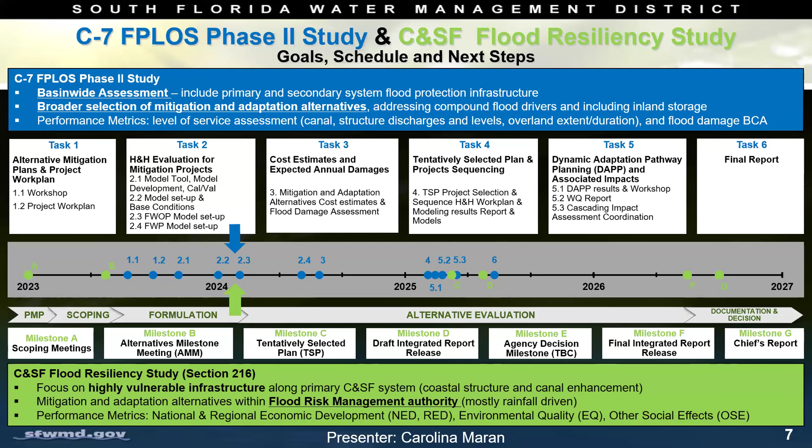And here you have a little bit of the tasks that will be developed. You can see that we end this FPLOS basically mid-2025, when we will have one of the major deliverables from the 216, which will be the TSP, the Tentatively Selected Plan. So I think it's important for you all to understand why we are here, how we are ensuring that those two studies are communicating with each other, and how the project teams are really collaborating as we find those alternatives for those basins and throughout the phases of both of those studies. I have one more slide.

Again, I'm going to repeat that because I think it's a little bit of what we want to get out of this workshop today. We really want to be able to focus on what we need at the C-7 Basin, in addition to what we know we might be getting out of the 216 C&SF flood resiliency study. So secondary canal enhancements, secondary canal interconnections, storage basin-wide, integrated nature-based green infrastructure solutions, and interbasin connectivity, and really what else we need to understand as a basin that we can do here to reduce flood risks.

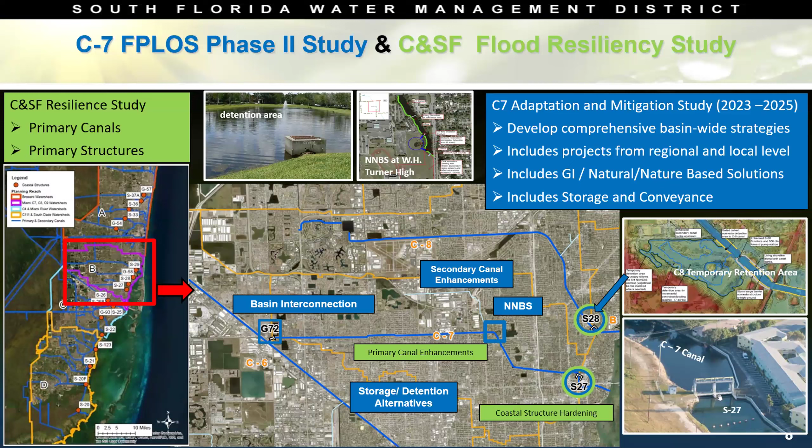Thank you. So can you hear me? Yes, coming in well. Okay, thank you.

Good morning, everyone. Thank you very much for attending this C-7 Adaptation and Mitigation workshop. I will give a quick overview of the flood protection level of service program and this C-7 study. Next slide, please.

Let me start by sharing some numbers. We have over 2,200 miles of canals, over 2,100 miles of levees and berms, and also 160 major drainage basins, over 1,469 water control structures, including 89 pump stations. And we have over 60,000 acres of constructed wetland system.

Lake Okeechobee has a water surface area of over 450,000 acres. And the water conservation area is about 960,000 acres. So we have a large flood control infrastructure system. Next slide, please.

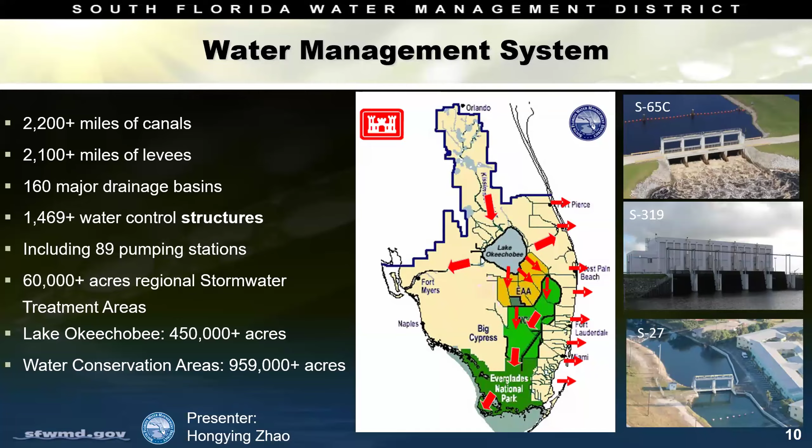Meanwhile, we encounter numerous challenges. Rapid urban development and population growth, significantly contrasting the condition in the 1940s. Many structures have already surpassed their intended lifespan. Climate change, as has been testified at Congress, is turning extreme events into new norms. And for Miami-Dade County, we have so many vulnerable coastal gravity structures. All of these factors underscore the significance of the level of service program: safeguarding tomorrow, today. Next.

So in a phased approach, the level of service program is really to assess flood protection level of service across all 16 counties in an 8 to 10-year cycle, evaluate and prioritize long-term district infrastructure needs, identify at-risk structures and needed improvements, and provide a formal process to initiate mitigation and adaptation efforts. Design, permit, and construct identified projects to achieve resilient flood protection goals. Next, please.

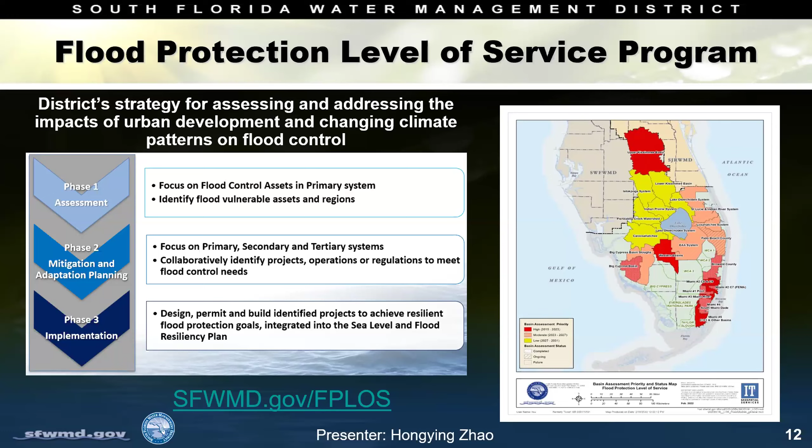As both Dr. Kadach and Dr. Maran mentioned, the purpose of today's workshop is to brainstorm adaptation and mitigation options to help build flood resilience for the C-7 or Little River watershed. This is your hometown, and you all have a lot of knowledge of the basin. And here is just a quick summary of this watershed.

We have 6 cities: Village of El Portal, City of Hialeah, Miami Shores Village, City of Miami, North Miami Beach, and the City of Opa-locka. There are 254,000 residents based on the 2022 census database, and also additional visitors and workers. Over 118 critical assets, including airport, fire stations, waste transport facilities, hospital, medical facilities, public school, law enforcement center, etc.

And 46% of the population are disadvantaged under the climate change category. In terms of CDC Social Vulnerability Index, 67% of the population has an index of 0.8 or higher, which is the highest ranking. And 27% of the population has an index between 0.6 and 0.8, which is the second highest ranking. Next.

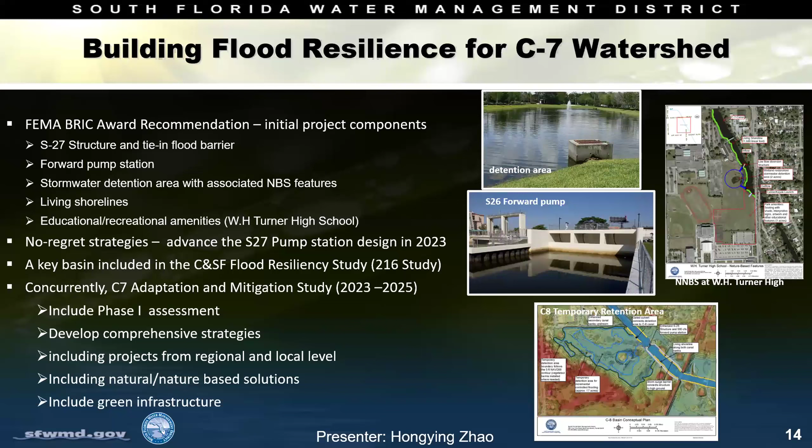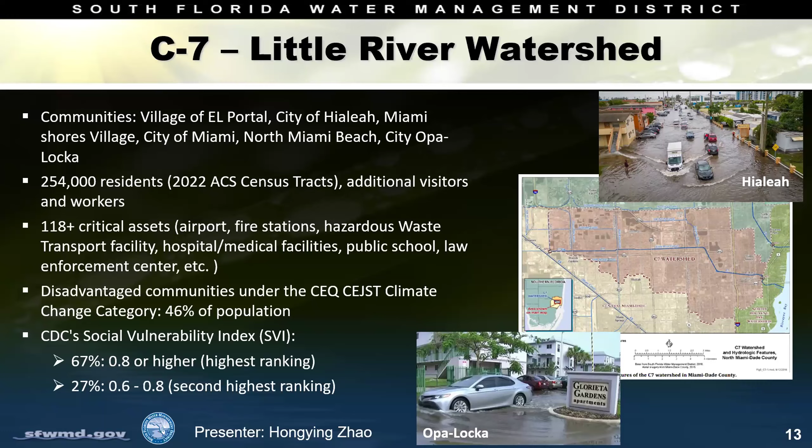Just want to echo what our Chief Resilience Officer, Dr. Maran, just said in the beginning. We understand the challenges ahead and recognize the key components to make it a success. Collaboration is paramount at both planning and implementation phases.

Adopting a basin-wide coordinated approach is essential to address both local and regional priority needs effectively, and embracing a hybrid approach, integrating both gray and green infrastructures alongside nature-based solutions, is imperative. And implementing no-regret actions in the short term, but ensuring they're robust, adaptable, and evolvable over time.

Toward the end of this workshop, we will share with you how you can actively participate and contribute to this project. So let's move forward together, addressing these challenges head-on and build a more resilient future for our Little River watershed. Thank you.

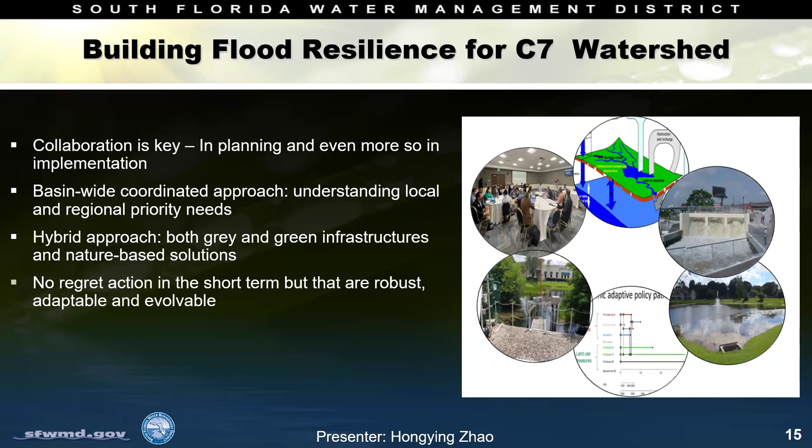Thank you, Dr. Zhao. Now, I'd like to just pause for a moment. We've heard a lot of information from Drs. Maran and Zhao, and I want to just pause for a moment and allow for any questions or clarifications. Remember, you can go ahead and raise your hand and we will unmute you. I see a question. Let me see who we've got. And I would like to ask participants as they come off of mute to say their name and organization. And I see that we've got Munir Ingram. You can come off of mute.

Yes, can you hear me? Coming in just fine, thank you. Okay, how are you? My name is Munir Ingram. I'm with the Little River Farms Homeowners Association and surrounding community of the C-7 watershed.

I'd like to know about the developments. We have two developments, one that's directly on the identified area of the enhancement zone where they plan on putting a multi-complex apartment on the basin of the C-7, directly on the lake, on the C-7 canal. But there's also the Silver Blue Lake that is adjacent to the C-7. I'd like to know if the studies have been done to see what filling in that water storage would cause to the surrounding community as far as flood resiliency, as far as lake center development, trying to fill in things like 56 acres of the Silver Blue Lake in the general area that you see that's been identified around the C-7 canal.

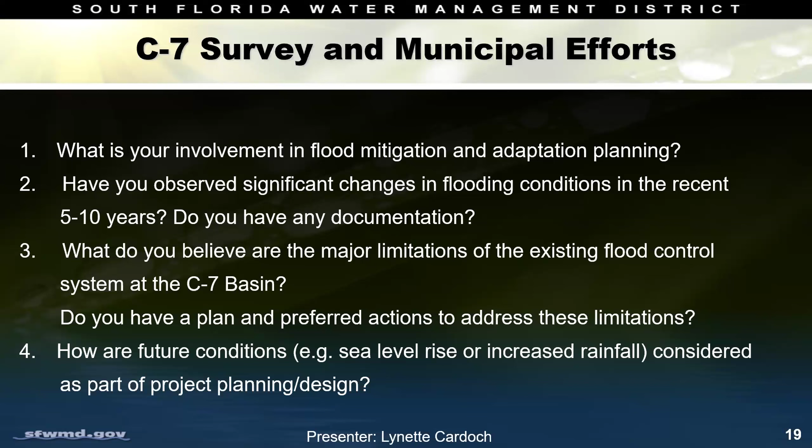Now, you're going to see on this survey the 8 questions, and these are the first 4. We really want to understand more on the involvement for flood mitigation and adaptation planning, and also get your feedback on the types of changes that you may have seen in your flooding conditions in the last 5 or 10 years, and also any specific documentation you may have. There may be some limitations in the existing flood control system that you're able to see that we would like to also collect from you. And if you have any specific plans or actions that are addressing any of these limitations, and also as you're looking at project planning and design, how are you incorporating your future conditions? These can be, for example, sea level rise or increased rainfall. Next slide.

We're also interested in the use of any green infrastructure or any sorts of technologies that you have for flood mitigation, and to be able to describe those projects and initiatives. Now, part of that also involves understanding if you have any specific locations or open spaces that can accommodate any flood mitigation activities. And that can be things like, do you have any parks or recreational areas, vacant lots? Are folks looking at roadside areas, medians, anything on waterfronts, any place that there could be potential water storage activities or water collection?

And also understanding as we're going through, are there any expectations for this FPLOS study? And are there any existing flood mitigation projects or initiatives in your areas that you have seen that have been particularly effective for your community? So those are the 8 questions.

Now, as we move to the next slide, I want to just touch that there are many activities that are already going on. And so we want to be sure that we're collecting those activities, but also being able to share the things that are happening in the community. And so, for example, we've already seen that there are activities with county adaptation action areas. And this is a designation in the coastal management element of the local government comprehensive plan.

So with that, I would like to hand it off to Michael DelCharco, Vice President at Taylor Engineering, to give us an update on the assessments and results to date. Mr. DelCharco? Thank you, Lynette. Good morning, everybody. Thanks for attending.

And I'm going to go through a lot of the slides and the modeling results to date. We couldn't show everything, so we're showing some summaries for you. Eventually, all the data will be available through the district, but for now, we'll be presenting some summaries. And I do have Joe Wilder on the call with us, and he's the lead engineer and modeler for this, so he can answer any of your detailed modeling questions.

There's a lot to go through here, so be sure to take notes, and at the end, we'll have time for questions, and we'd love to chat with you. So as others have said, the assessment is really looking at the primary system here of the C-7, looking at the effects of changes in sea level rise.

You'll see on my slides I say SLR, and that just means sea level rise. And the way the district handles sea level rise for these FPLOS studies is to simply add 1 foot, 2 foot, and 3 foot to the existing conditions. It's just kind of an easy way to be consistent across the entire water management district, but it really gives us a good idea of what the impacts to the watershed will be under those future scenarios.

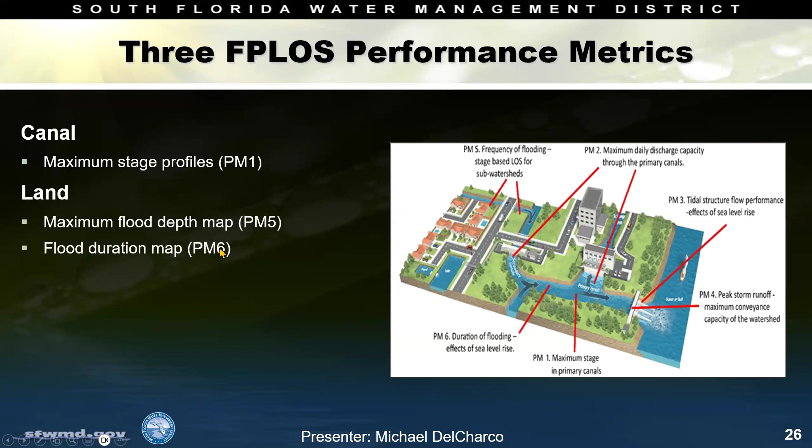The model is an integrated groundwater surface water model. It looks at overland flow, unsaturated flow, groundwater flow. It's fully dynamic channel flow, which means we can model all the gates and operations and all the structures that are there. But the groundwater component, as you all know, is very important in this modeling system.

So the model was set up and calibrated to September 2017 Hurricane Irma, and it was validated using two storms, the 2022 Tropical Storm Alex and the May 2020 no-named event. The input data was the NOAA Atlas 14. We used storm surge. This is an example down here of the storm surge hydrographs that we used at the mouth of the system. It runs all the way down through the intracoastal.

And then we were using the end of wet season groundwater elevation map. The storm events that we're running are the 5, 10, 25, and 100-year recurrence frequency events. And we're using the gate operations from S27 based on the Water Management District's gate operation rules.

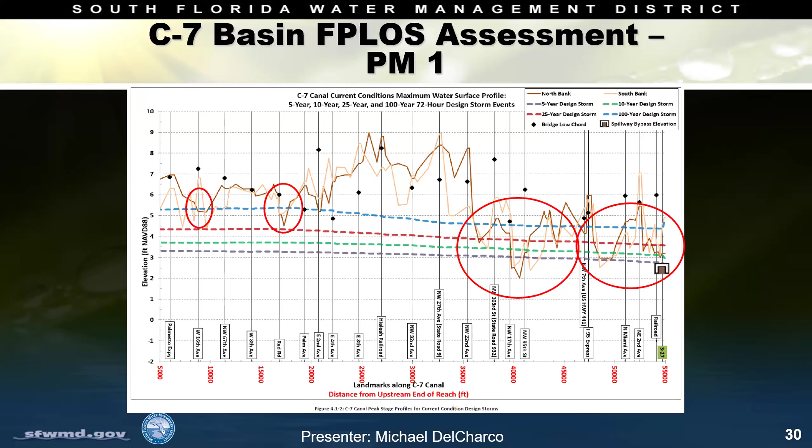So overbank flooding is one source of flood waters in the basin, but the other source is just rainfall straight on the basin and the inability of the system to handle that rainwater and get the water to the C-7 canal. So we talk about the primary canal being the C-7, and then the secondary canal being those stormwater systems that are moving the water out of the neighborhoods and into the C-7 canal. And so, just looking at the pluvial, the rainfall that's hitting the basin, you can see that there's issues with getting that rainfall to the C-7.

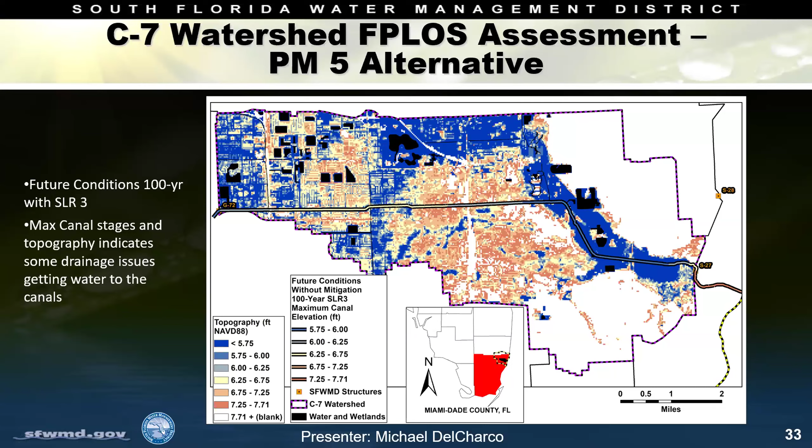So in summary, the C-7 canal is predicted to be overtopped in several segments during even just the 5-year storm event. So that's something that needs to be mitigated quickly. The S-27 is unable to maintain those water levels for any of the storm events and will be overtopped during all storm events. And then many areas in the watershed had land surfaces above the peak elevation, but still flood, which means they're impacted by local flooding problems.

And so for each of these, we're looking at different mitigation processes that we need to deal with to alleviate the flooding. So looking at phase 2, the phase 1 part of the district studies, as was mentioned before, is really to look at and assess what is going on in the basin and what is the flood protection level of service.

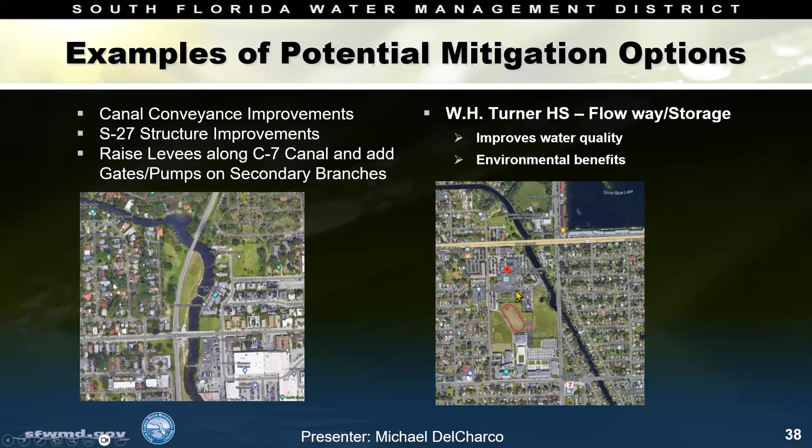So next, we showed you the canal areas that are overtopped, and so we can then go in and look at specifically the canal banks right here and here, and then look at raising those banks to keep these overflow events from happening.

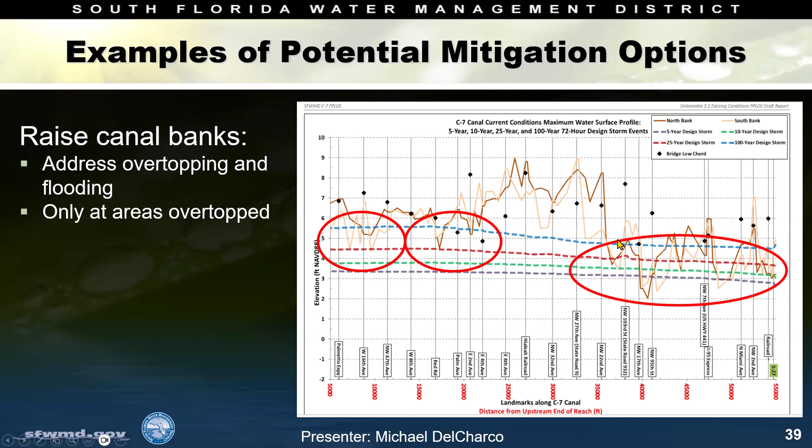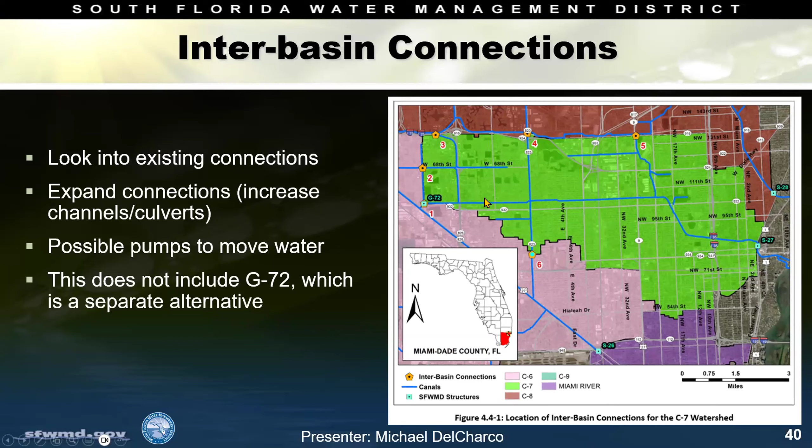That would assume that you had some local flooding event that was contained to the C-7 basin and not necessarily the whole area, because if the whole area is flooded, then they can't receive the water either. But these are certainly options that we're looking at. This doesn't include a G72 option, which we're going to talk about in a second. Some ideas on environmental benefits, including, if you could take this area, which is the canal bank right now, right?

If you could take this area and somehow create internal living shorelines that aren't going to affect your flood profile, but that would allow the water to meander through a more environmentally friendly bank system, it could improve the environmental benefits. So that's certainly an idea.

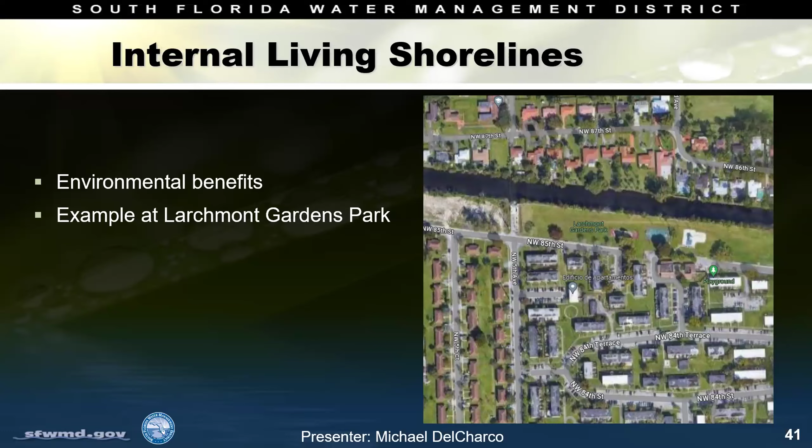And then you have additional storage ideas. We know a park that's near and dear to everyone's heart there is the Amelia Earhart Park. It's a huge park, and you could look at, is there potential for temporary storage during an event? You wouldn't change the character of the whole park, but you would make it available for flood storage during an extreme event. There's some parks adjacent to I-95. There's a wetland north of S27. Maybe store water upstream S27, look at golf courses.

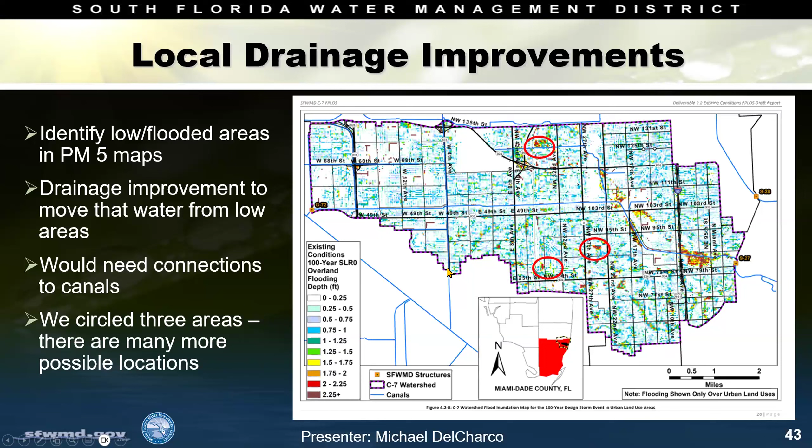So look, some local drainage improvements. When we do the modeling, we see these areas that have very deep flooding, overland flooding during a 100-year event. And so, you have this canal right here. Is there a way to move that water from there to there? These are much further to get to. We do have these connections to stormwater. So is it possible to move the water to these stormwater connections and then get it out? So another idea to look at. We just circled 3 here.

There's many more. Then looking at the G72 or the Hialeah Gardens pump, is there potential for taking the water to the west, taking it out of the G72 and then putting it in the C6 canal and get it out by the S26 or north by the S31? So again, the beautiful thing about modeling is we can run that in a model and see if the benefits are there.

Then, of course, looking at operational changes, the district's always looking at tweaking their operations. So we run their standard operations as they are now, but you could look at drawdown scenarios before events if they're coming, or changing operations in other ways. So that's another beautiful thing about modeling, is we can look at that.

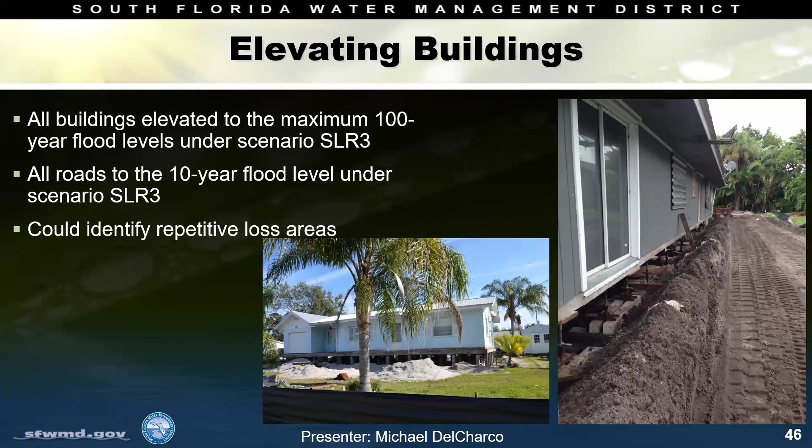Elevating buildings is always an option. And some of those low-lying areas that show a lot of flooding, maybe just raising the homes up out of the flood area is a possibility. There's state and federal programs that help fund the cost of that. I know the state recently tried to pass some more legislation on that. It didn't pass this year, but it may in future years. But there's plenty of scenarios where just elevating the buildings would help.

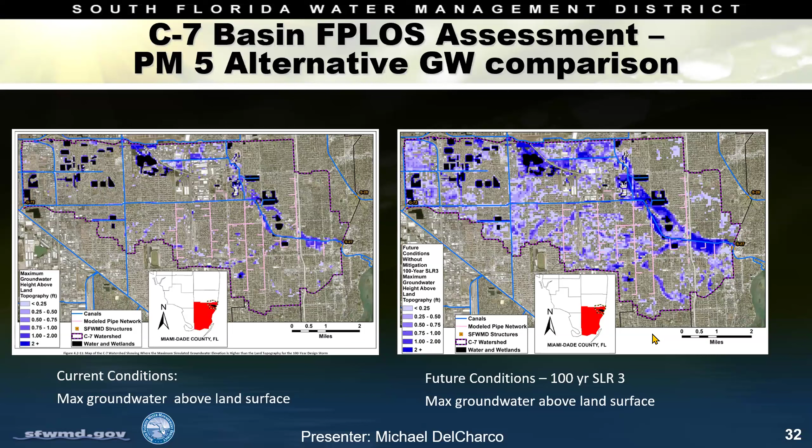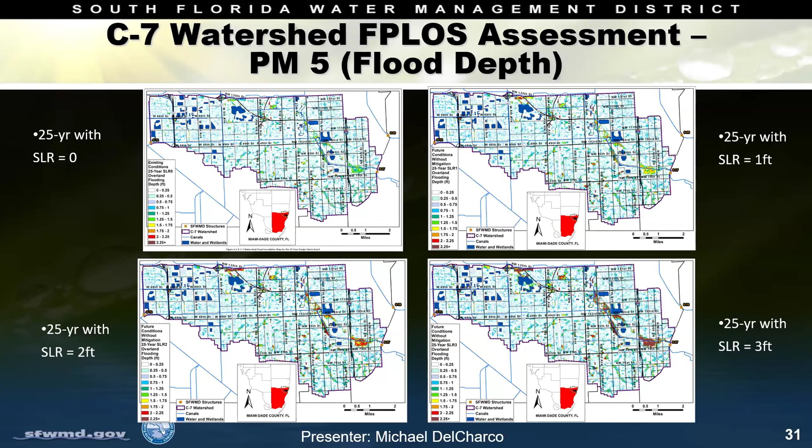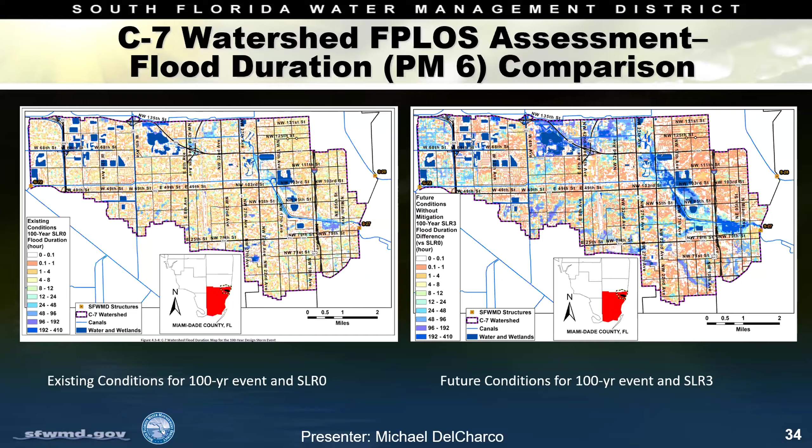My first question is, are you using the MIKE Hydro Basin model for this one? It's MIKE FLOOD and MIKE SHE. MIKE FLOOD and MIKE SHE, and MIKE Hydro River. So not MIKE Hydro Basin, but MIKE Hydro River. Okay. When you do the scenario analysis in the model, what sea level boundary condition did you use? Did you impose the sea level on top of the existing water level data, or how did you do that? The question I wanted to ask is, do any of those runs include sea level rise as well as storm surge? I see you have 2017 in the boundary.

Yeah, for the design storm events, the future condition boundaries, essentially, the district did a statistical analysis on the Virginia Key tide gauge to come up with a theoretical storm surge hydrograph. And so that was for our current conditions, baseline 2022. And then for future conditions, we simply added 1, 2, and 3 feet to whatever that hydrograph was.

So that's going to include both the increase to the storm surge respectively based on a 1, 2, or 3 foot. So that's how the physical boundary along the 1D surface water was applied, as well as the 2D overland. A different process was used for groundwater.

Thank you. I think my last question is, I think when I do the modeling work, one of the challenges I face is to represent storage in the model. So you have a 2D there, but is there any consideration for future to use any projected storage, right? Other than using the basin storage for future scenarios? Storage options aside from what's already available within the model or within the basin.

Yes, we try to find some new storage areas. That's going to be one of the alternatives that's looked at. There's already some open lands, but perhaps there's repetitive loss areas that are not storage areas that could be turned to storage areas. But as you know, it's sometimes hard to create storage when it's simply not there.

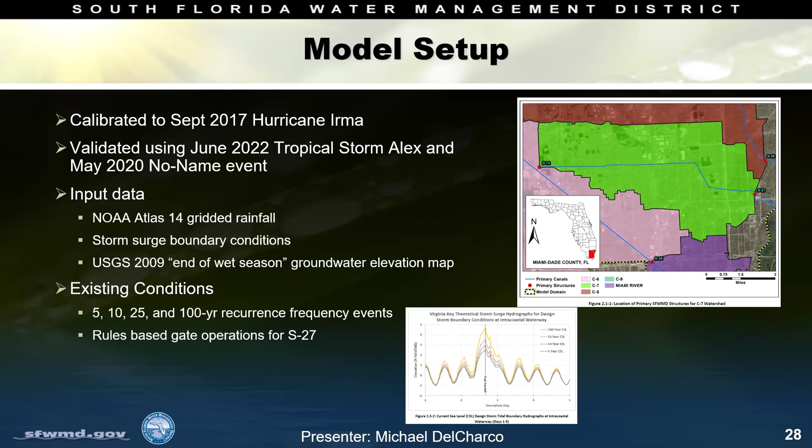Because on the C-7 will be one of the areas where the TSP will propose some pilot elevations. So we could move some of these actual implementation actions ahead using various Corps programs, which is the gist of the presentation, which I really appreciate, which is the integration of these different projects, regardless of which Corps authority or which agency is running it. So well done. Thank you.

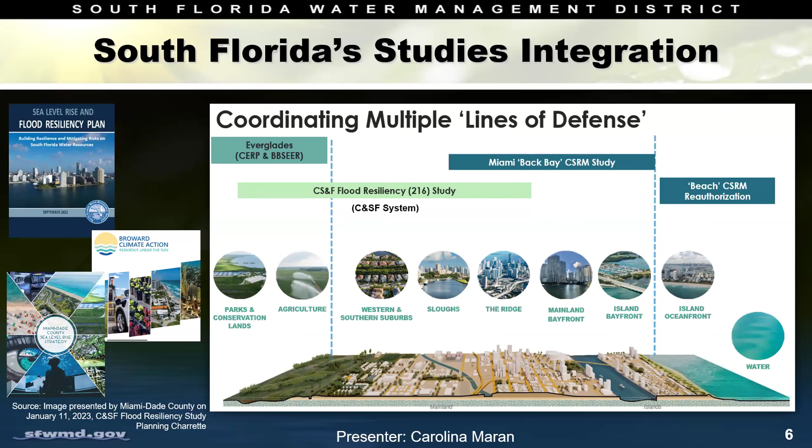It was illuminating, enlightening, not things we have not seen before. However, the mitigation or adaptation areas are somewhat new. Not our park spaces, but I just wanted to elevate an input tool, a community input tool run through Miami Waterkeeper. I'm sure some of those on the call have seen it, but it's based out of the community.

It comes from the community giving input on areas where there could be living shorelines, rain gardens, urban forests, or even stormwater pocket parks. I saw that in this study, we were looking at areas around the beloved Amelia Earhart Park and along Larchmont as a shoreline area, but there's other opportunities that are highlighted in that input tool, including underused green spaces, parking lots.

So those interstitial spaces throughout that C-7 basin study area might be helpful in posing some areas for consideration in the future. I think some folks are even mentioning some kind of adaptation tools as well. So I just wanted to highlight that. Thanks again for the presentation and your time this morning.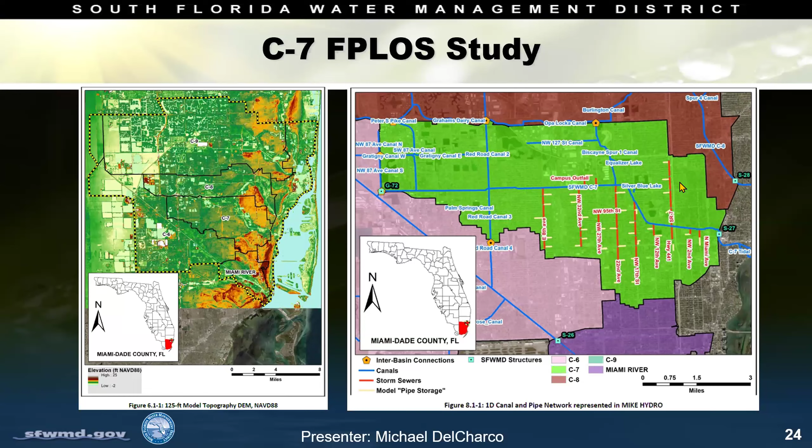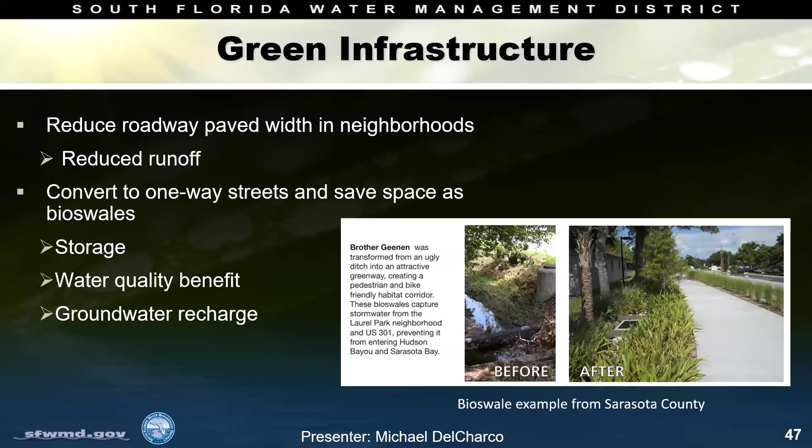Thank you. Of course. I think that's it for hands raised. Now, I'd like to just go a moment to our next slide on that, because there's some, yeah. Sorry. No, we've got a lot of stuff going. Just next one. Yep, sorry. One more.

So as we're going through these conversations, I'd like to get some feedback on, did you have any thoughts on the adaptation projects, the brainstorming results that Michael presented? And also, are you seeing anything with specific flood hotspots? Anything with other stormwater infrastructure projects that we should know about? I'm really grateful for the information that we've gotten so far, and just want to make sure we're not cutting discussion short.

And I see Christian Camrath with his hand up. Go ahead, Christian. Can you hear me all right? Yep, coming in well. Okay, great. Yeah, I just wanted to, this basin, and I forgot to introduce myself earlier.

I'm with the County Office of Resilience and help lead the Little River Adaptation Action Area work, which is a multi-jurisdictional planning effort that really focuses, at least initially, on areas east of I-95 within the Little River Basin where there's a compound flood risk. So one of those hotspot areas is where you mentioned the septic to sewer conversion efforts are happening. As Jim mentioned, it's a focus area of the Back Bay study for potential home elevation and business flood proofing.

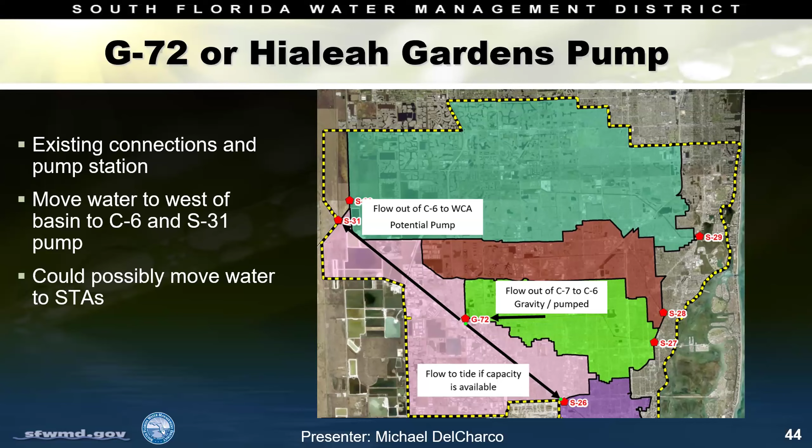Good. Going back to that last slide as far as hot spots and possible green infrastructure. One of the definite hotspots that you all have already located and acknowledged is Northwest 17th Avenue between Northwest 107th Street and along that C-7 canal that goes down into 103rd, where you're going to use a portion of Turner Tech's field as a storage area. But I also have a question about Northwest 107th Street, intersecting with that Northwest 18th Avenue canal. I think one of the engineers said that 18th Avenue is the natural connection for the Little River.

Miami-Dade put a Biscayne Bay water quality pollution reduction filter along Northwest 107th Street to try to mitigate some of the phosphorus going into the Little River Canal and exiting out to Biscayne Bay. But I wanted to locate for you a nature-based solution and green infrastructure. If you look at the GIS map of Northwest 107th Street between Northwest 17th Avenue and Northwest 18th Avenue, there's a green space owned by the Village of Miami Shores with some native Florida trees. It's basically an urban forest within a suburban area. I wanted to have you all look into working with the Village of Miami Shores on that green space that they presently own.

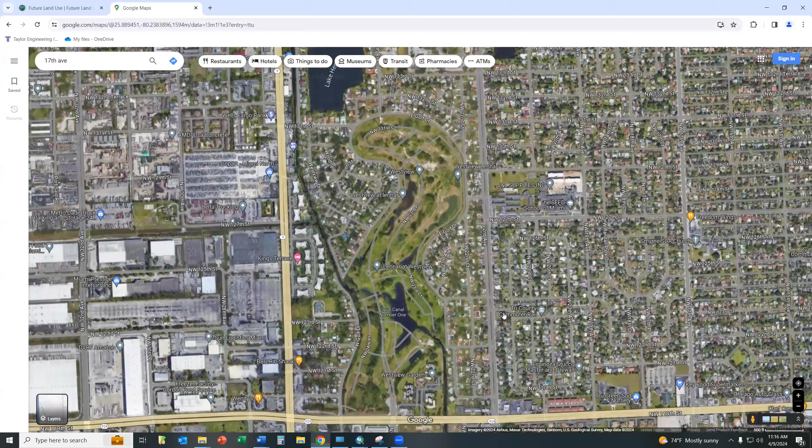Yeah, all of that's gone now. That green space that you see north of Northwest 119th Street and 22nd Avenue, adjacent to those warehouses, that's all been built up. In the past, that was a green space where the water from the Biscayne spur canals would flood into, but presently that is no longer; that map is inaccurate because right now that development is full of Lennar Homes. Lennar Homes at Westview is what it's called.

Mr. Ingram, I think you asked a lot of very, very good questions. Yeah, I'm making a lot of notes. And in addition to making notes for all of your questions, I did get some feedback from the county, and what they are sharing with us is for any development in Miami-Dade County, the developer definitely will need to provide signed and sealed engineering reports to demonstrate there's no adverse effect to surrounding properties. So that's definitely something for you to look into, no adverse effect to surrounding properties from any development. So yes, all are very, very good questions. I definitely hear your concerns.

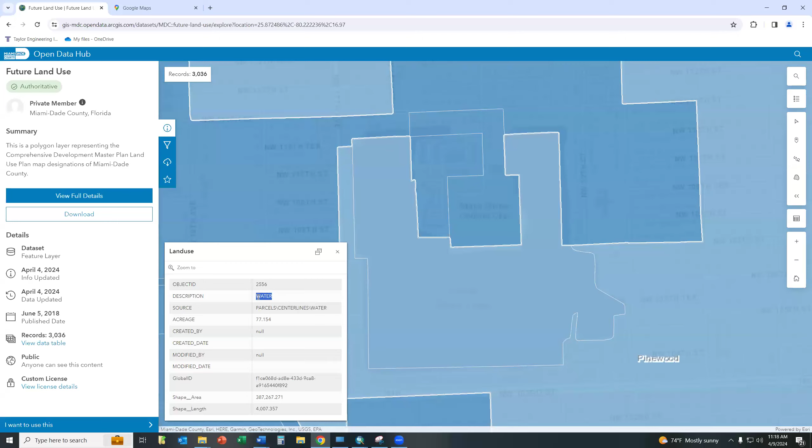Thank you. And like I said, this is some neighbors and constituents that live also in the village of El Portal, because we're in an area of unincorporated Miami-Dade, and Commissioner Bastien is commissioner of District 2. And because we have so many municipalities in this area, it's a lot of projects, but there's also a lot of pollution going into the C-7 canal that's possibly going unchecked. But I appreciate this project going through so that everyone is aware of what's going on within these unincorporated areas where we don't necessarily have the voice of some of the bigger cities that surround us.

So thank you for this opportunity to present from not only the community, but also for the future of Miami-Dade County and the Everglades Restoration Project, and also the resiliency of all of Miami-Dade County, the state of Florida and the United States. So thank you very much.

Thank you. And Munir, just to reinforce our support, if there is something out of this study that you need packaged somehow, we can help in summarizing so you have the right information and the right assumptions. This is something we can discuss internally and with the county, a summary of some of the results that might be useful for you. So let us know if this is something you would benefit from and if you need any help from us.

It definitely would, ma'am, because at the commissioner meetings, if I only have 2 minutes to speak and we just used 2 hours possibly to present everything that was said, there's very vast information. There's an information gap for me, being a concerned citizen. The higher-ups in the resiliency department, South Florida Water Management, and the U.S. Army Corps of Engineers really have to communicate with the commissioners to let them know that these projects really have to be vetted correctly if we really want to build a resilient Miami-Dade County.